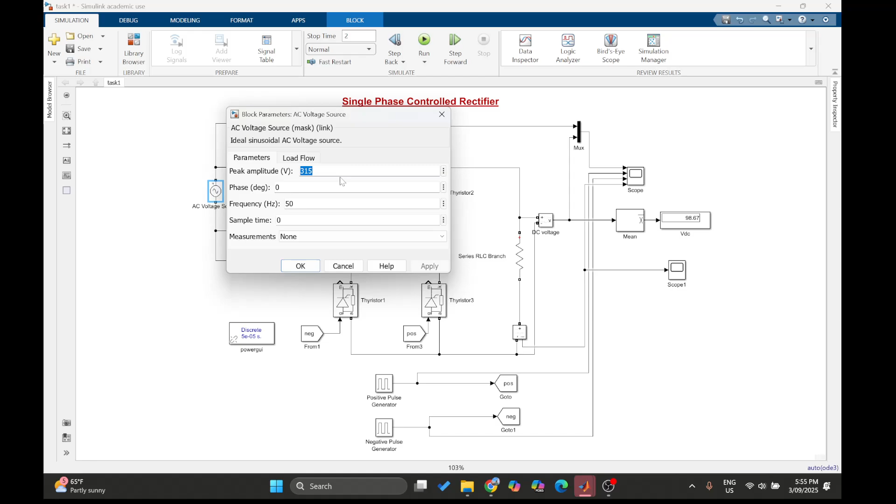Firstly, the circuit setup. In our model, we start with the single phase AC source of 315 volt peak amplitude, which is about 223 volt of phase voltage, and I'm using a 50 Hz frequency. Then we use a full bridge of 4 thyristors. Each has an on-state resistance of 0.001 ohm, forward voltage drop of 0.8 volt, a snubber resistance and snubber capacitance as shown here.

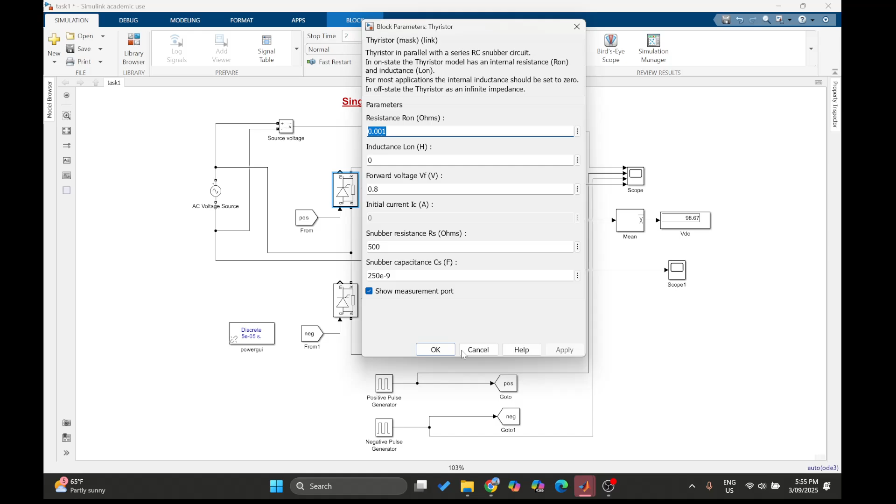Finally, two thyristors are connected in series, and two pairs of thyristors are connected in parallel with the load. From the positive terminal of your AC source, it is connected to the midpoint of the two series thyristors, and from the negative terminal of your AC voltage source, it is connected to the second pair of thyristors.

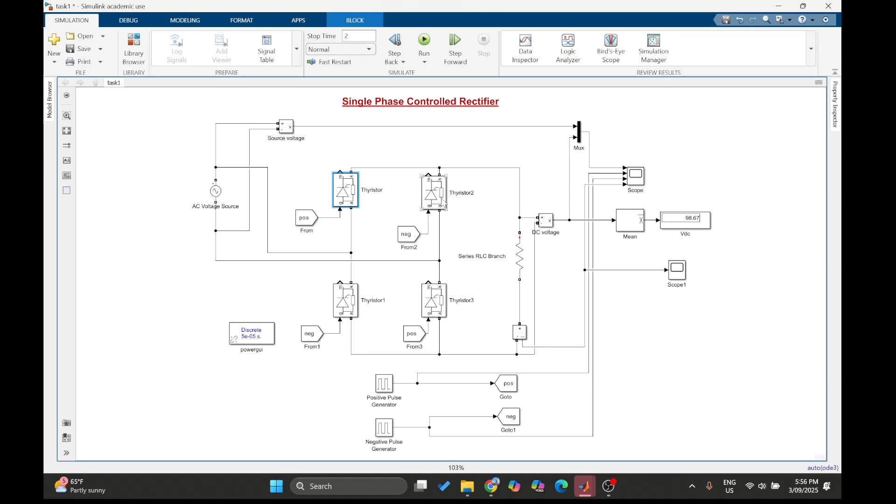And I am using a resistive load for now. I will change my load later into an inductive load and show you the difference that we get in our output.

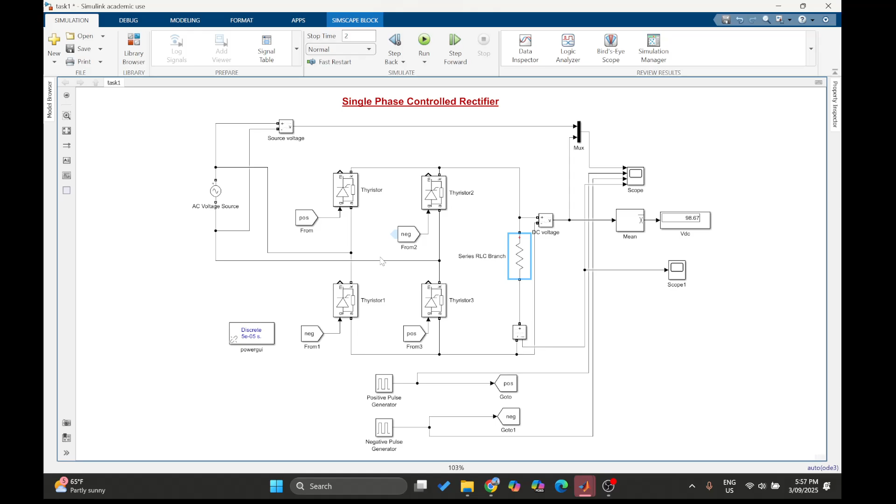Next is the gate pulse control. To control these thyristors or SCRs, we need 2 pulse generators. The first one has a phase delay of 0.005 seconds. That means it will trigger at the 90-degree firing angle, and its amplitude is 1, period is 0.02 seconds, and pulse width of 5%.

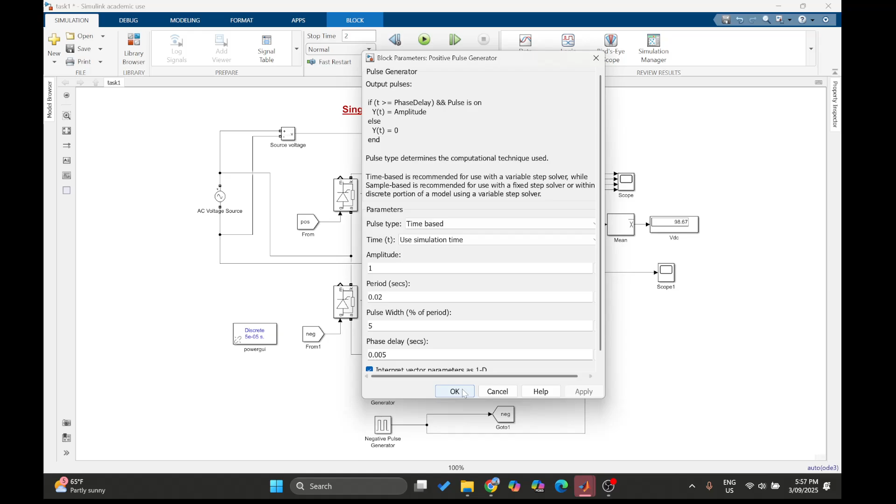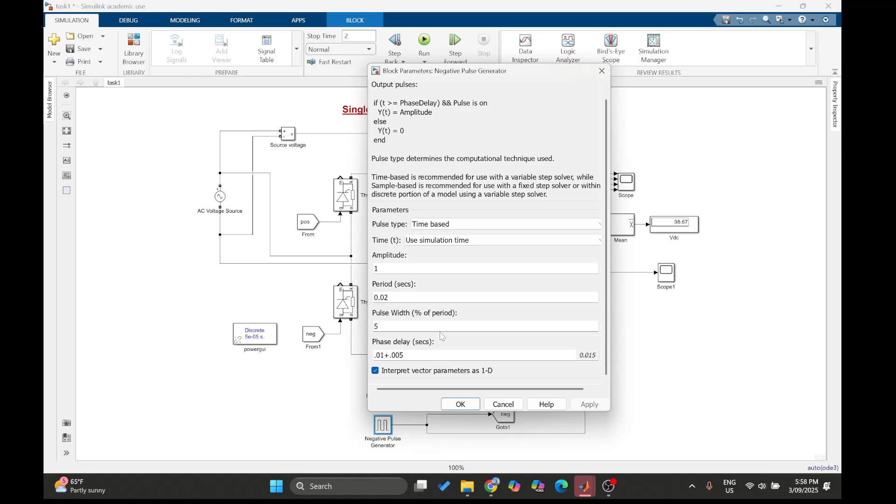Then the second is shifted by a half cycle plus the same delay, so 0.015 seconds in total, and it will generate a pulse when we reach 270 degrees.

So when the first positive pulse triggers, it controls this thyristor and thyristor number 3. It will switch on and off these two thyristors, and in the negative half cycles of your AC voltage waveform, the negative pulse generates and it will trigger and control thyristor 1 and thyristor 2.

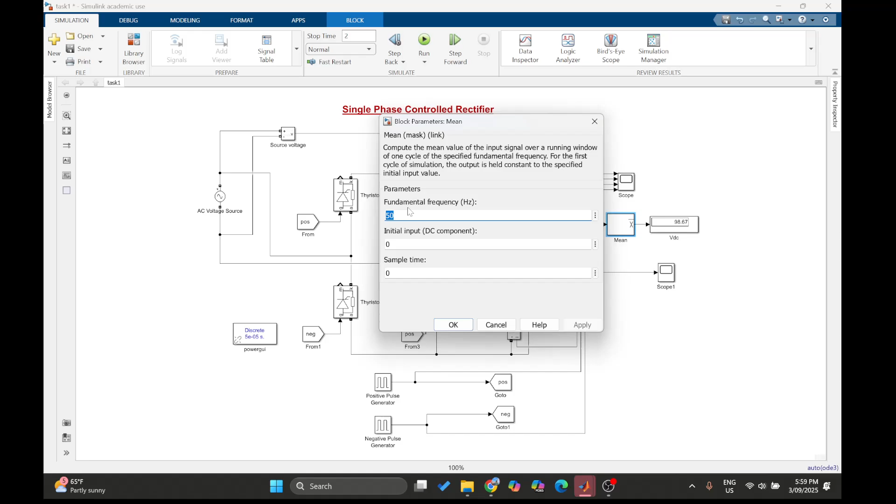I have a voltage measurement block to measure the AC source voltage. Similarly, I am using another voltage measurement block to measure the voltage across the load, and I have one current measurement block. From the DC voltage measurement block, it is given to the mean block with a frequency of 50 Hz, and I can get the output DC voltage. I'm using a mux, and all the signals are given to the scope.

Then when the negative pulse generator triggers, another pair of thyristors turns on, and it conducts from here to here. Okay, then you can see that we have a DC average voltage of 98.67.

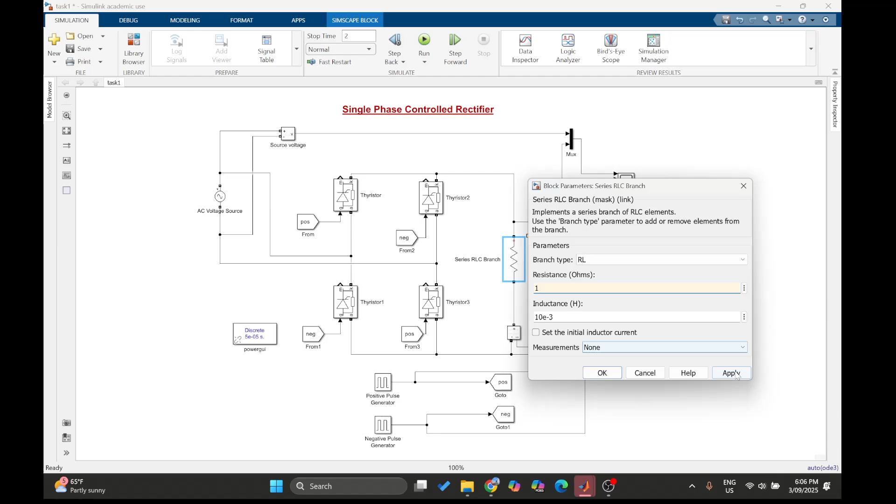Now let's quickly change our load to RL load with inductance of 10 to the power minus 3. Yeah, that should be fine, and let's keep a resistance of 1 ohm and run. Now you can see that, okay, now you can see that from here to here it is normal,

but now when you reach here, the thyristor is conducting, and approximately from here to here, there is a current flowing through the circuit. Therefore, the thyristor cannot block the current, and it still conducts. Therefore, we experience a negative DC voltage, which is undesired. Therefore, we will use one freewheeling diode.

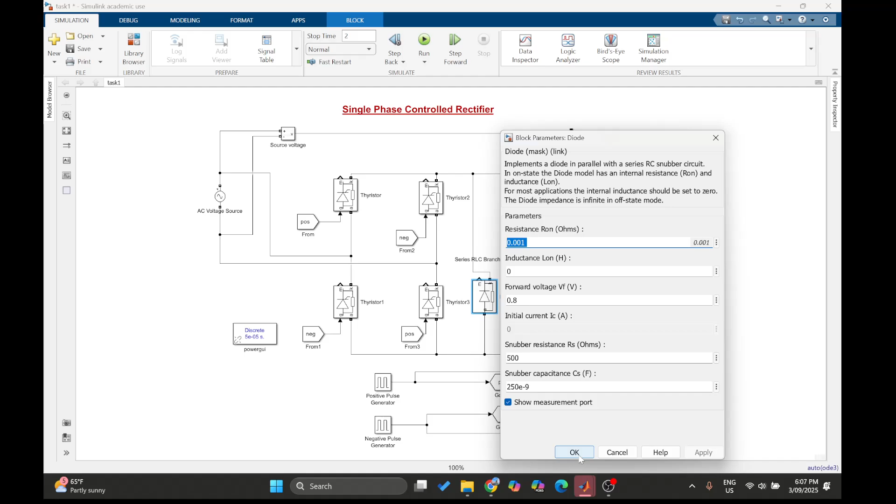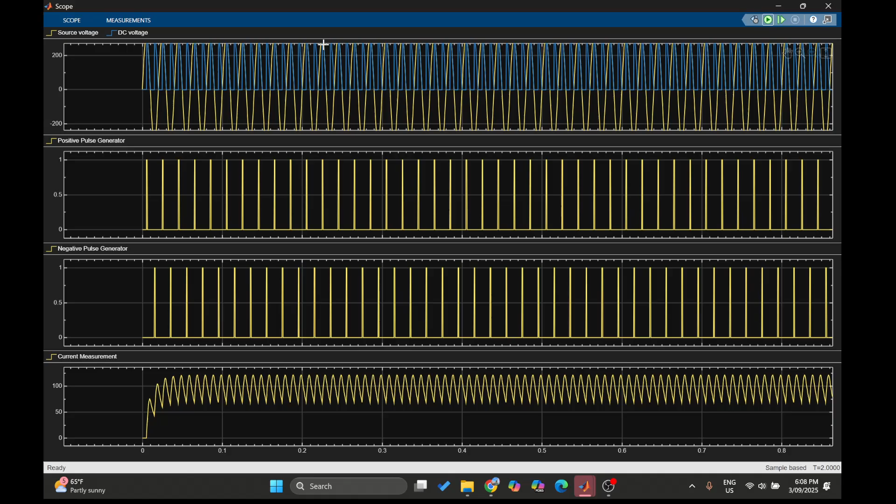And connect this freewheeling diode in parallel to the, that should be fine. And let's see changes. Okay, now earlier we had the voltage across the negative half cycle, so that was shifted using a freewheeling diode.

Why did we earlier have the negative voltage over here? That's because of the inductive load, and that is undesirable. So we are using a freewheeling diode to clean up our waveform and make our DC output more clean and usable. That's how a controlled rectifier works.

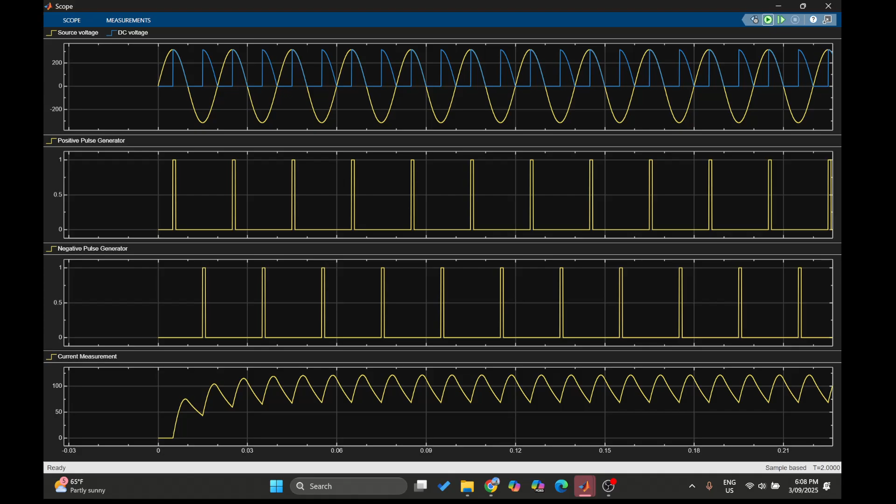So you can now say that we have a complete walkthrough of a single phase controlled rectifier, from circuit design to firing controls to simulation results.